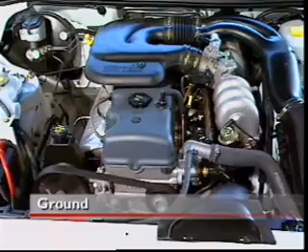Ground is a term used to indicate connecting a component to the vehicle frame or chassis. Current flows from the positive terminal of the battery through a controlling device such as a switch, then through the component. The return path is through the vehicle chassis or frame to complete the circuit and allow the component to operate. Using the vehicle frame in this way simplifies the circuit wiring.

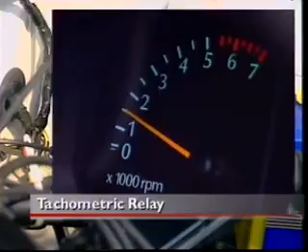A tachometer is used to indicate engine RPM. It is normally connected to the negative terminal of the ignition coil. The pulses from the ignition primary circuit are then used as an input to operate the tachometer. At idle speed, the frequency of the pulse is steady. As the engine speed rises, the frequency of the pulse increases as the tachometer indicates.

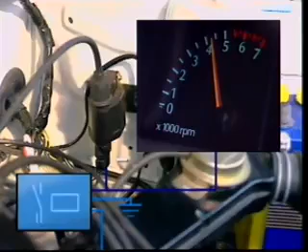A tachometric relay uses the same input from the negative side of the ignition coil to ensure the relay operates only when the engine speed is above a specified minimum, say 350 RPM. In this case, it operates as a safety device, ensuring the fuel pump operates only when the engine speed exceeds this figure.

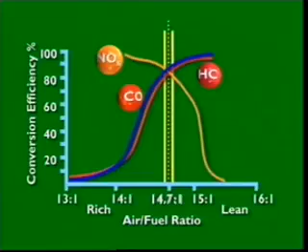The term stoichiometric ratio describes the chemically correct air-fuel ratio necessary to achieve complete combustion of the fuel. It is represented by the Greek letter lambda. The value of the ratio is 14.7 parts of air to 1 part of fuel. By mass, that's 14.7 kilograms of air to each kilogram of fuel. So if lambda equals 1, the air-fuel mixture is at the stoichiometric ratio of 14.7 to 1.

If an air-fuel mixture has a higher figure, say 1.03, there is more air in proportion to the fuel than 14.7 to 1, and the mixture is slightly lean. A mixture with a lower lambda value has less air, proportionately, than fuel, and the mixture is slightly rich.

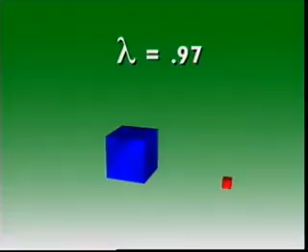The exhaust gas oxygen sensor is also called the lambda sensor, since it can be used to maintain the air-fuel ratio at lambda equal to 1, within very close limits. It can be installed in the exhaust manifold, where it measures the percentage of oxygen in the exhaust gases. A high percentage of oxygen may mean too little fuel is entering the engine, the mixture is too lean, and the lambda is greater than 1.

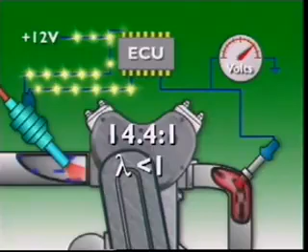The sensor delivers this information to the ECU, which adjusts the mixture accordingly. Similarly, a low percentage of oxygen may indicate too much fuel is entering the engine, the mixture is too rich, and the lambda is less than 1.

A potentiometer is a mechanically variable resistor which, in EFI applications, is normally a film type. It can be linear or circular in construction and has 3 electrical connecting points. 2 are at the ends of the resistor and the third is attached to a center sliding contact, arranged to move across the resistor. A reference voltage is applied to the resistor so that a steady current flows through it.

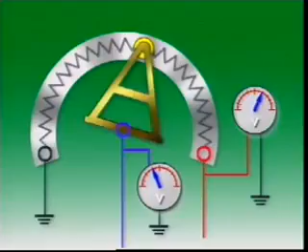As the center sliding contact moves across the resistor, it measures the voltage at the point it is in contact with, and provides a reference voltage for that position. In automotive applications, the circular form is commonly used as a throttle position sensor, with the center contact attached to the throttle plate. The throttle plate position can then be monitored by the control unit.

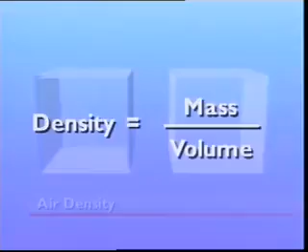The density of air is its mass per unit volume. This means a volume of air at high density has a higher mass than the same volume at low density. And if there is a larger mass of air, it will contain proportionally more oxygen.

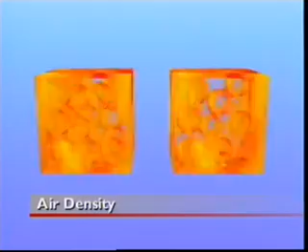The density of air in the atmosphere changes at different temperatures and altitudes. That means the air that enters an engine at different locations could have very different amounts of oxygen. The amount of oxygen in air directly affects how well it supports combustion, so it can be important in determining an air-fuel ratio for an engine.

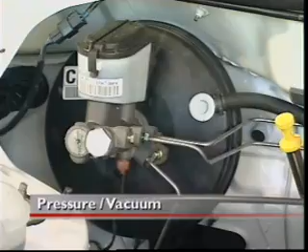Pressure and vacuum are terms in everyday use in the automotive industry. Manufacturers recommend a pressure to which tyres need to be inflated, and manifold vacuum is used to operate a brake booster. Gases exert pressure on all bodies they make contact with.

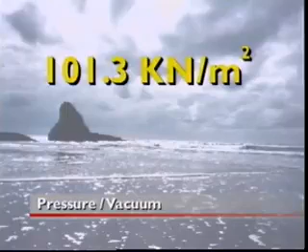This applies also to the air in Earth's atmosphere. Air has mass, and as a result it exerts pressure, called atmospheric pressure, not only on the Earth's surface, but also on all objects on the Earth's surface. Atmospheric pressure varies with altitude, but at sea level it is calculated as 101.3 kilonewtons per square metre, or 101.3 kilopascals.

But if this is so, why does a pressure gauge read 0 when it is not in use? This is because the gauge indicates pressure above atmospheric pressure only. This reading is called gauge pressure.

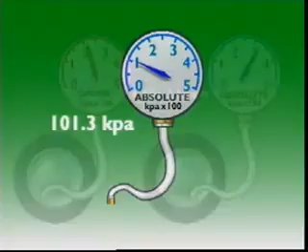If absolute pressure was needed, an absolute pressure gauge would be needed, and it would read 101.3 kilopascals when not in use. Absolute pressure equals gauge pressure plus atmospheric pressure. Readings on an oil pressure gauge or on a tyre gauge should really have 101.3 kilopascals added to them. It is normal practice, however, for the gauge reading alone to be taken as the accepted value.

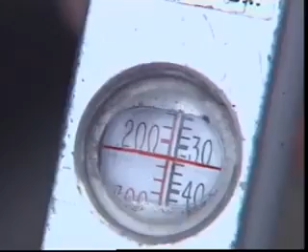If the pressure being measured is below atmospheric, a pressure gauge with its zero reading is of no value. This is why, for pressures below atmospheric, as in a manifold vacuum or depression, a vacuum gauge is normally used.

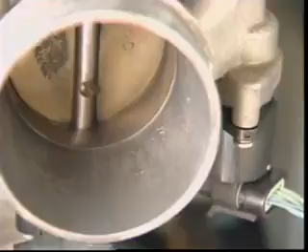In a petrol engine, the position of the throttle plate controls the volume of air, or air-fuel mixture, entering the manifold. At idle speed, the pistons draw air away from the manifold at a faster rate than it can pass the throttle plate into the manifold, so a high vacuum or depression exists. At wide open throttle, depending on load, the vacuum is much less, and pressure in the manifold rises, closer to atmospheric.

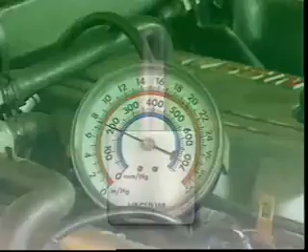A vacuum gauge can be calibrated in millimetres of mercury, and the scale reads from 0 to 760. The scale is derived from the fact that atmospheric pressure supports a column of mercury 760 millimetres high.

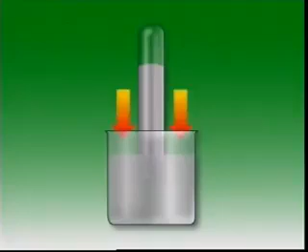This glass tube, closed at one end, is filled with mercury, then inverted in a bowl of mercury. The column of mercury in the tube falls to about 760 millimetres. The space above the mercury is a vacuum, and the atmospheric pressure on the exposed surface of the mercury supports the column. At sea level, atmospheric pressure supports a column of mercury 760 millimetres.

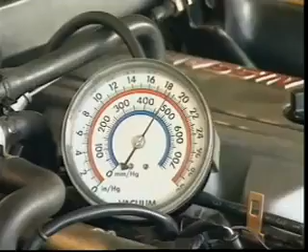But at higher altitude, its height falls, which indicates that atmospheric pressure at that altitude is less. A scale of 0 to 760 millimetres can thus be used to indicate the degree of vacuum or depression that exists below atmospheric pressure. At idle speeds, a vacuum gauge connected to the intake manifold will indicate a reading of approximately 450 to 500 millimetres of mercury, depending on altitude.

Some engine management systems signal changes in atmospheric pressure by using a barometric pressure sensor in the ECU. This is because, above sea level, air pressure is reduced, so to maintain the correct air-fuel ratio, a vehicle has to reduce the amount of fuel delivered to the engine.

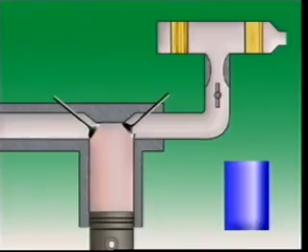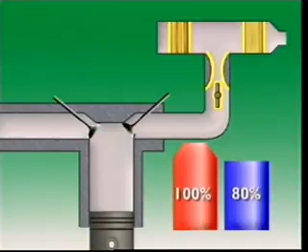Volumetric efficiency compares the volume of air entering a cylinder during intake to the internal volume of the cylinder when the piston is at bottom dead center. It is usually expressed as a percentage. In a naturally aspirated engine, one without forced induction, volumetric efficiency can never be 100%. This is because of the resistance to airflow that occurs at the carburetor, manifold, and the intake valve.

With forced induction, the incoming air is compressed so that a greater volume and mass of air is forced into the cylinder during the intake stroke. That takes the volumetric efficiency to above 100%.

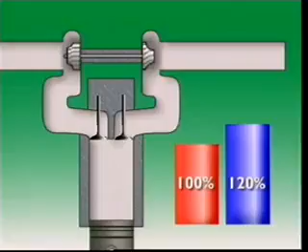This section examines basic principles of electronic fuel injection. Because of the need to comply with exhaust emission regulations, the modern petrol engine requires a fuel system of extreme accuracy and long-term reliability. A correctly matched air-fuel ratio must be available at all times and under all conditions. This is satisfactorily achieved by electronic fuel injection.

EFI is a pressurized indirect injection system that uses solenoid-operated injectors with a fixed orifice. When they're energized, fuel passes through the injector body.

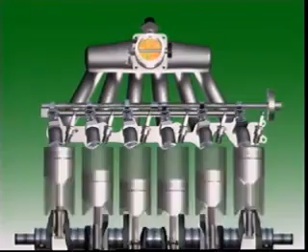This arrangement is called a multi-point system. One injector is located in each intake manifold runner or pipe adjacent to each cylinder. An electronic control unit, or ECU, opens the injectors by pulsing their electrical current. They spray fuel into each intake port directly in front of each intake valve.

Fuel leaving the nozzle is atomized, and it mixes with the air also entering the system to form a combustible mixture. Fuel pressure is kept at a constant value above manifold pressure, so that the amount of fuel injected is determined only by the length of time the injector is held open by the ECU. This is called the pulse width of the injector.

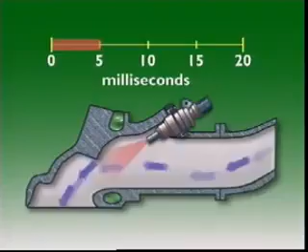The triggering signal to operate the injectors can be supplied from the ignition system or from crank angle sensors on the crankshaft or the camshaft.

Engine fuel requirements change according to engine speed, load, and temperature, so the ECU needs information on these changes. Sensors measure these variables, then relay the information to the ECU in the form of electrical signals. The ECU then calculates the duration of pulses necessary to provide the fuel required.

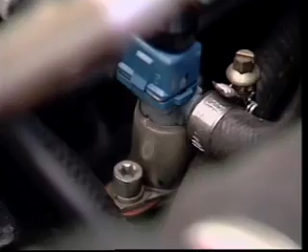Extra fuel required during cold starting can be supplied by increasing the number of injection pulses, or by fitting a separate cold start injector that operates independently of the main injectors when the engine is cranking.

The throttle body injection system, also called a central fuel injection system, has a single injector, or in some cases two injectors, mounted in a carburetor-like throttle body.

The throttle body assembly is fitted to the flange of the intake manifold, and the fuel is sprayed into the intake air entering the manifold. The air-fuel mixture is then carried through the manifold into the engine. Fuel pressure is maintained at a constant value, and an ECU pulses the injector or injectors.

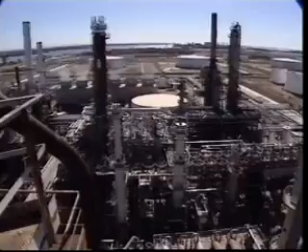This section examines petrol fuel. Petroleum or crude oil is taken out of the ground as a mix of impurities and highly flammable compounds of hydrogen and carbon, called hydrocarbons. It is processed into many products, including petrol and diesel fuel.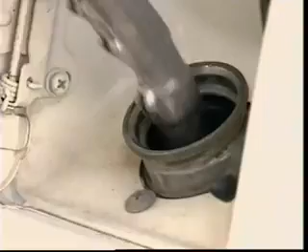Petrol is used in different forms in different engines. It is very volatile, mixing easily with air to form gas or vapour. The more effectively liquid petrol is changed into vapour, the more efficiently it burns in the engine, so high volatility is desirable.

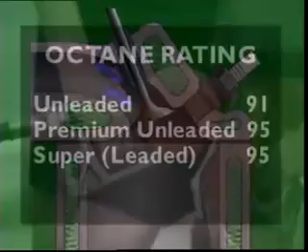How petrol burns must be controlled. If it burns too quickly, it can cause detonation, sometimes called ping or knock. So special additives are used to slow down the rate of combustion. Octane rating is a measure of how well a petrol resists detonation. The higher the rating, the less likely it is that detonation will occur.

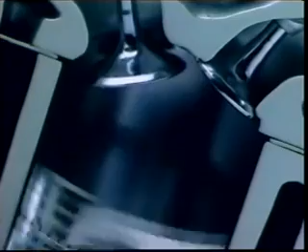Higher operating pressures in the combustion chamber can also cause abnormal combustion. A lead-based anti-knock additive used in leaded petrol can allow these higher pressures without loss of performance. Lead additives are also lubricants. In high-compression engines, lead compounds coat valve faces and seats and help prevent wear.

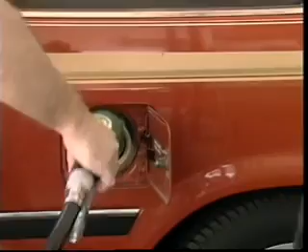Leaded petrol is used in older cars that have few or no emission controls. It should never be used in engines designed for unleaded fuel. Governments now limit levels of lead in petrol, and unleaded petrol is replacing leaded petrol. So-called unleaded petrol may contain small amounts of lead, but maximum levels are tightly controlled.

For petrol to burn properly, it must be mixed with the right amount of air. For a petrol engine, the air-fuel ratio by mass is about 15 to 1. By volume, it's about 11,000 to 1. Not much petrol, but lots of air.

A lean air-fuel mixture has more air in proportion to the amount of fuel. A slightly lean mixture gives good fuel economy and low exhaust emissions, suitable for cruising conditions. A mixture that's too lean can make an engine run roughly and overheat.

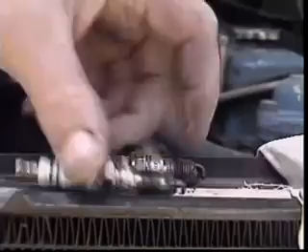A rich air-fuel mixture has less air in proportion to the amount of fuel. A slightly rich mixture can produce more power at lower temperatures, but the extra fuel it uses steps up fuel consumption and emissions. A too rich mixture fouls spark plugs and causes incomplete burning, and that reduces power.

In normal combustion, the spark plug ignites the mixture and a small ball of flame forms around the tip of the plug. The piston compresses the mixture, the flame spreads faster and moves evenly to halfway through the mixture. The piston reaches top dead center. The flame picks up more speed, then shoots out to consume the rest of the mixture. Combustion ends with the piston a short way down the cylinder.

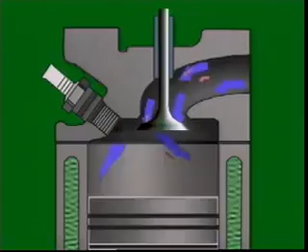Detonation is a violent collision of flame fronts in the cylinder caused by uncontrolled combustion. It occurs after the spark plug has fired. The sudden rise in pressure can cause a knocking sound.

Sustained detonations can lift temperatures enough to cause pre-ignition, also called auto-ignition. Pre-ignition occurs before normal combustion, when something in the combustion chamber heats up enough to ignite the mixture before the spark plug fires. A mixture may also ignite simply because it is unstable under the higher heat and pressure.

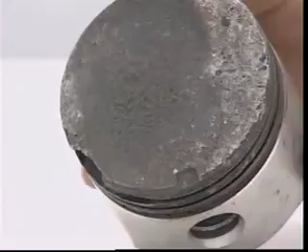Detonation and pre-ignition can cause severe damage and must be avoided. Engine management systems use knock sensors to detect detonation, and they retard ignition to stop it.

This section examines the air supply. In multi-point injection systems, the air required for the combustion of the fuel is led from the air filter through the throttle valve and into the common manifold or plenum chamber. From here, individual intake runners or pipes branch off to each cylinder.

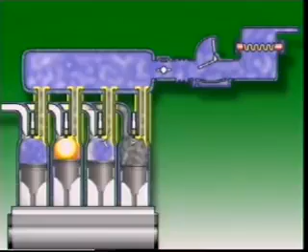All of these pipes are of equal length. The design of the intake system determines how large an air mass can be drawn into a cylinder at any given engine RPM. This is where most advantage can be taken of electronic fuel injection, since it can achieve exactly uniform distribution of the air delivered to the cylinders.

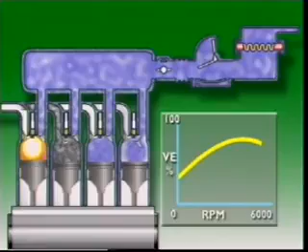With unobstructed passages to each cylinder, the cylinder fills with air as efficiently as possible. The breathing of the engine, or its volumetric efficiency, is improved. The more air crammed into the cylinder, the denser the air-fuel mixture when ignition occurs. This increases the thrust on the piston and increases engine power output too.

The temperature of the air influences how dense the air-fuel mixture will be. Cold air is denser than hot air, so it has a greater mass in any given volume. This is why, on most intake systems, the air entry to the intake is away from engine heat, to ensure the entry of cool air.

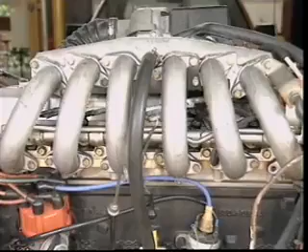Since the manifold carries air only, it doesn't need to be heated by coolant. Filtered air arrives at the intake port as cold and dense as possible, ready for mixing with the fuel from the injector.

The amount of air entering the engine must be measured, so that the amount of fuel injected into it forms a mixture to suit the engine operating conditions at that time. The volume of air entering the engine varies according to the position of the accelerator pedal and the engine speed and load. Changes in volume are reflected in changes in manifold pressure between the throttle plate and the intake ports.

When the pistons draw air away from the manifold more quickly than air can pass the throttle plate into it, the pressure in the manifold falls. At idle speeds, this pressure is low. A high depression or a vacuum exists.

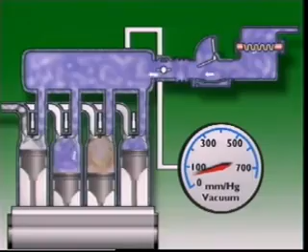As the throttle plate opens, the pressure approaches that of the atmosphere, and the depression or vacuum tends to fall in value.

Devices measuring air entering the engine send a varying electrical signal to the ECU. The signal can be a measure of the volume of air or of the manifold pressure. In both cases, this information is combined with the engine speed signal to provide the basic setting for the injector pulse width.

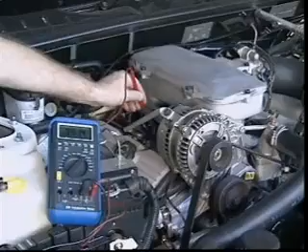An airflow meter measures the volume of filtered air entering the engine. It can be mounted on the air filter casing or close by. All air entering the intake flows through the meter, then through a sealed flexible hose or duct to the throttle body, then enters the engine.

Vane-type airflow meters have a spring-loaded vane or flap, which deflects according to how much air enters. The electrical signal to the ECU varies with this deflection, as contacts attached to the vane move across a potentiometer.

The intake system must be airtight, with no leaks downstream of the meter, otherwise inaccurate signals will be sent to the ECU.

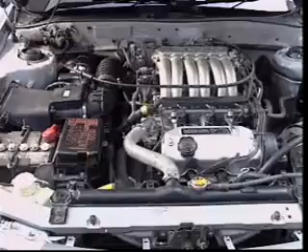Manifold pressure sensors measure pressure in the manifold. One common type has a small connector.

This section examines the fuel supply system.

The purpose of any fuel supply system is to deliver fuel to the engine in a form in which it can mix with air to form a combustible mixture. The fuel must be finely atomized to mix with the air. This is why injection systems deliver the fuel under pressure.

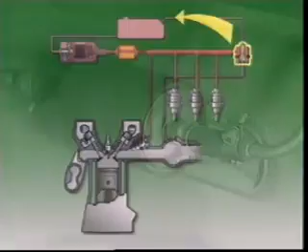The EFI system is a circulation system. Fuel is drawn from the tank by a fuel pump and delivered to solenoid-operated injection valves. Fuel pressure at the valves is maintained by a fuel pressure regulator, and excess fuel flows back to the tank through a return line. The fuel filter is directional. It is fitted between the pump and injection valves to stop contaminants reaching other parts of the system.

The fuel pump can be mounted externally on the chassis frame or submerged in the fuel in the tank. It is electrically operated and electronically controlled, driven by a permanent magnet electric motor, a sealed unit integral with the pump.

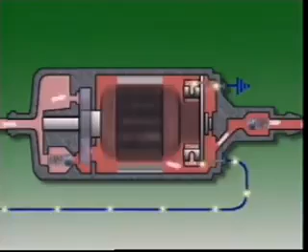Fuel flows through the pump and around the electric motor when it is running. There is never an ignitable mixture inside the pump housing, so there is no danger of explosion. The pump delivers more fuel than the maximum requirement of the engine, so pressure in the fuel circulation system is maintained at all times. A fuel pressure regulator maintains fuel pressure between the pump and the injectors.

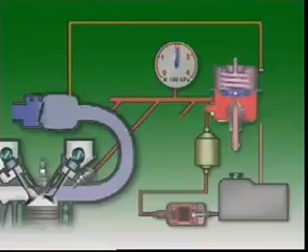In multi-point injection systems, the fuel pressure regulator has an inlet connection from the fuel rail and an outlet that lets fuel return to the tank. A control diaphragm and pressure spring determines the exposed opening of the outlet and the amount of fuel that can return. So the strength of the pressure spring determines fuel pressure in the fuel rail and keeps it at a fixed value.

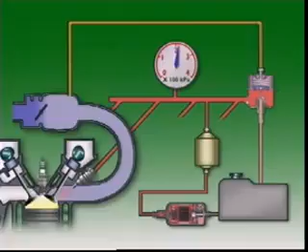However, the pressure in the intake manifold varies considerably with changes in engine speed and with load, so the pressure drop across the injector must also be taken into account. For any injection duration, if fuel is held at constant pressure, then as manifold pressure varies, so does the amount of fuel delivered. That means fuel pressure must be held constant above manifold pressure.

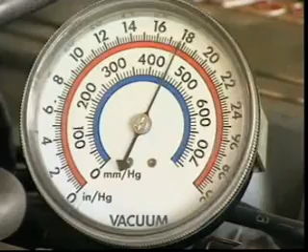This is done by sealing the spring housing of the pressure regulator and letting it sense manifold pressure via a connecting hose. Then, when the manifold pressure alters, so does the fuel pressure. When manifold pressure is low, as at idling, fuel pressure is low. As manifold pressure rises towards open throttle, so does fuel pressure.

Since the injectors are all subjected to the same pressure, they all inject an equal amount of fuel. The quantity of fuel delivered is thus controlled very accurately by the pulse width of the injector.

Manifold pressure sensing is not required in throttle body systems, as the injection occurs above the throttle plate at atmospheric pressure. So fuel pressure is determined by the force of the regulator spring acting on the diaphragm.

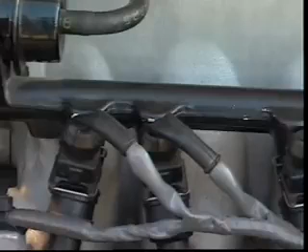The injectors are sealed into the manifold by O-rings that prevent air entering at that point. The O-rings, together with plastic caps on the injector nozzles, also act as a barrier to heat being transferred to the injector body. For a short time after an engine is switched off, engine temperature keeps rising, and that can cause excessive vapour in the fuel lines.

The pump stops this with a non-return valve on its outlet, which maintains the pressure in the fuel line during that short time. This pressure will decay over about 20 to 30 minutes, but it ensures effective hot starting characteristics.

When the engine is running, the circulation of fuel ensures cool fuel is being delivered at all times, and vapour formation is prevented. The pump control circuit normally allows the pump to operate for a few seconds only when the ignition is switched on, and thereafter during cranking, and when the engine is running above a specified minimum RPM.

This section examines electrical functions in EFI.

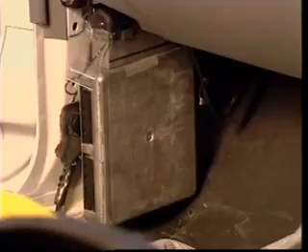In the electrical system, detecting elements sense engine operating conditions and relay this information in the form of electrical signals to the electronic control unit, or ECU. The ECU is a small computer, programmed with the operating characteristics of each individual application. This information is stored in its memory.

The control unit processes input signals to determine the amount of fuel required by the engine at that instant. It then grounds the injection valve circuit to open the solenoid-operated injection valves. The length of time injectors stay open in milliseconds determines how much fuel is injected.

A basic EFI system needs input signals on ignition switch operation, engine cranking, the amount of air entering the engine, coolant temperature, throttle position and engine speed, and battery voltage. The varying data received from all of these inputs allows the ECU to arrive at its injection setting.

This vehicle began from a cold start and has been running only a short time. It is now operating in top gear with a light throttle only. What influences its fuel requirements?

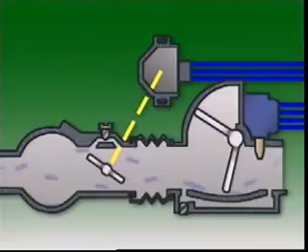A relatively small volume of air is entering the engine. The throttle position is associated with economy or cruising conditions. Engine speed is in the low to mid-range. Coolant temperature is still below normal. These factors combined produce a fuel setting.

It is less than if the throttle were opened suddenly for acceleration or to overcome increased load. However, it is more than it would be if coolant temperature were at its normal level.

The varying signals can be supplied by variable resistors, by switch contacts, by voltage pulses from the ignition system, or by sensors.

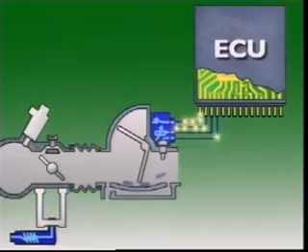An airflow meter varies its signal by the deflection of a vane as air enters the engine. Deflecting the vane moves contacts across a potentiometer to signal its position and thus the amount of air entering the system.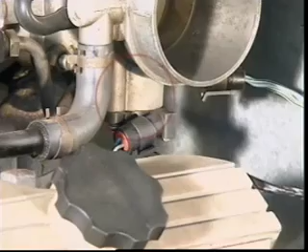Throttle position can be signaled by a potentiometer attached to the throttle shaft. It provides a continuous, varying signal through the entire range of throttle position. Throttle position can also be signaled by a contact-type switch, but it signals the idle and fully open positions only.

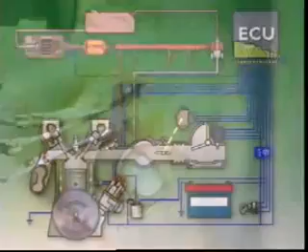Engine speed can be detected by a connection from the ignition system primary circuit or by a pulse generator type sensor on the crankshaft. The pulses are computed by the control unit into an engine RPM figure. They can also be used to trigger the injectors.

In multi-point injection, the injectors can all be triggered at the same time. This is called simultaneous injection, and the injectors operate twice per cycle, once each crankshaft revolution, each time delivering half the fuel for the cycle.

In a 6-cylinder engine, the injectors are triggered on every third ignition pulse. In throttle body systems, the central injector is normally triggered on every ignition pulse. However, if there are 2 injectors, alternate triggering may be used. At idling speeds, the frequency may be less to provide finer control.

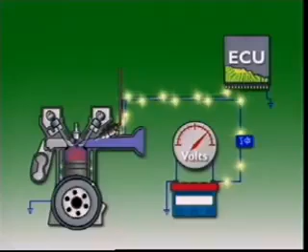The actual operating time of the injectors depends very much on battery voltage. The response time to lift the injector needle to the fully open position is about 1 millisecond. If battery voltage is low, this response time takes longer and the engine receives less fuel. The ECU can compensate for this delay by extending the duration of the injection pulse.

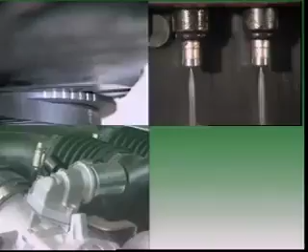In more sophisticated engine management systems, the control unit can control additional functions such as ignition timing, injection modes, idle speed, cooling fans, and fuel pump operation. To do this, however, more inputs are needed.

To control ignition timing, some systems replace the distributor with a direct fire ignition system. Between one ignition point and the next, the ECU calculates when the ignition point will occur. It then triggers the ignition accordingly. Ignition can be varied according to load, speed, coolant temperature, cranking speed, and battery voltage.

Identifying number 1 cylinder and the camshaft position allows different injection modes to be used. Sequential injection means injection occurs in the sequence of the firing order. Each injector opens once only in each cycle to deliver the fuel needed.

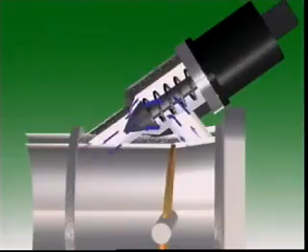Added load placed on the engine during idle can be compensated for by increasing the passageway of an idle speed control device. This lets more air bypass the throttle plate. This air has been measured by the airflow meter, so extra fuel is metered to maintain the same air-fuel ratio. The extra mixture thus delivered increases engine torque and maintains idle speed.

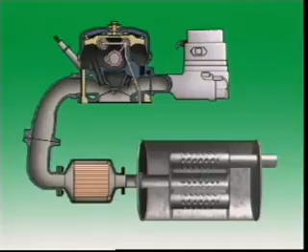For efficient operation of the catalytic converter, the mixture ratio must be maintained close to the stoichiometric ratio, 14.7 parts of air to 1 part of fuel.

Efficiency of combustion can be monitored by measuring the percentage of oxygen in the exhaust gas. A high percentage may mean the mixture entering the cylinder is too lean.

The oxygen sensor in the exhaust manifold or in the engine pipe tells the ECU how much oxygen is in the exhaust gas. The ECU then varies injector opening time to achieve a correct mixture ratio.

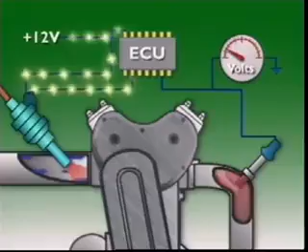Feedback also lets fuel settings change as components age. This is called adaptive learning. The ECU memorizes its fuel settings for different operating conditions and stores them for future use.

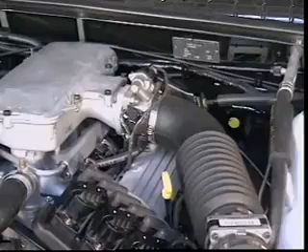If a fault occurs in a component or part of a system, a fault code can be displayed on the check engine lamp in front of the driver. Alternatively, a scanning tool can be connected to a diagnostic terminal and information on the fault can be analyzed.

Although most injectors operate at the nominal battery voltage of 12 volts, many sensors have a reference voltage of 5 volts. This is done by a voltage regulator in the control unit. It gives more accurate signaling, as fluctuations due to changes in battery voltage do not occur.

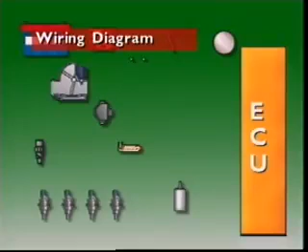This is a simplified wiring diagram for an EFI application. The battery is grounded to the vehicle frame at the negative terminal. Its positive terminal is connected to a tachometric relay and to the ignition switch.

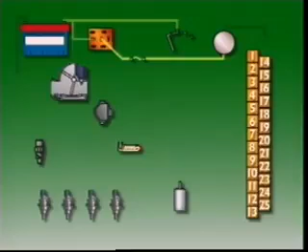A connecting wire runs from the tachometric relay to the positive terminal on the fuel pump. A fuse in the connecting wire protects the circuit. The fuel pump circuit is completed by grounding the fuel pump negative terminal to the frame of the vehicle.

When the fuel pump operates, current flows from the battery to the pump. It flows through the pump to rotate the armature and completes the circuit by flowing from the negative terminal through the vehicle frame to the battery negative terminal.

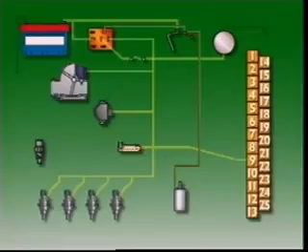Similarly for the other components in this simplified system, positive connections are made to a number of components from the tachometric relay. The relay only operates when the engine is cranking or running, so no current flows in any connecting wires at other times.

Identification of the sensors and their inputs allows easier identification of the wiring diagram for any given system. Follow the circuit for each component from the battery positive terminal and trace its path back to the negative terminal. Components are earthed either through the vehicle frame or the ECU.

The other EFI discs in this series examine in more detail some more sophisticated engine management systems and the operation of their components. You should view these other discs, then investigate these more complex systems for yourself.